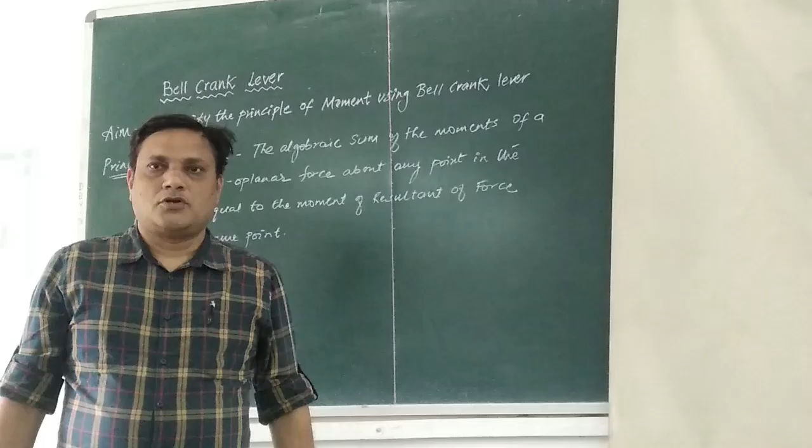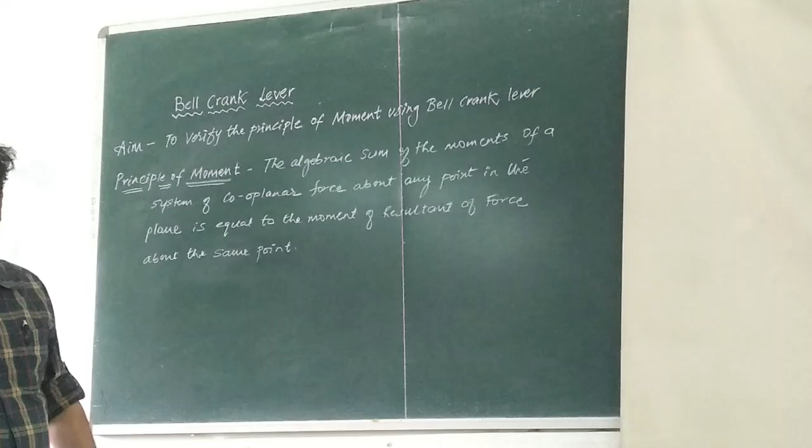So students, up till now you should have understood and also solved some problems related to moments. Today we are going to verify this law of moment, that is the principle of moment, using the Bell-Crank lever.

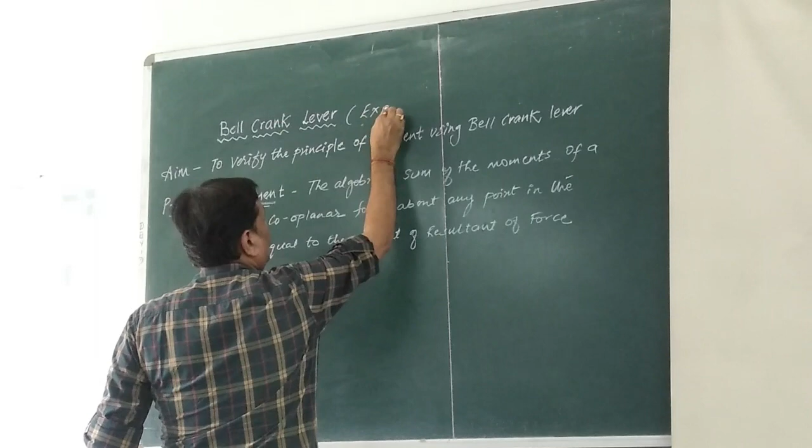Okay, this is experiment number 3 in your manual. See what it says: the aim is to verify the principle of moment using the Bell-Crank lever.

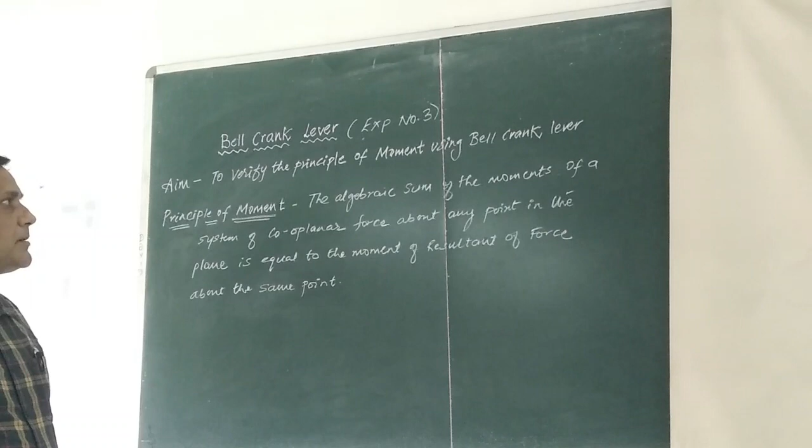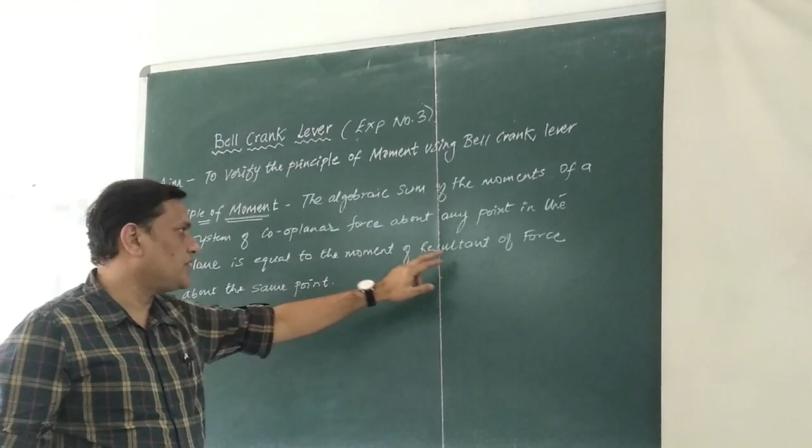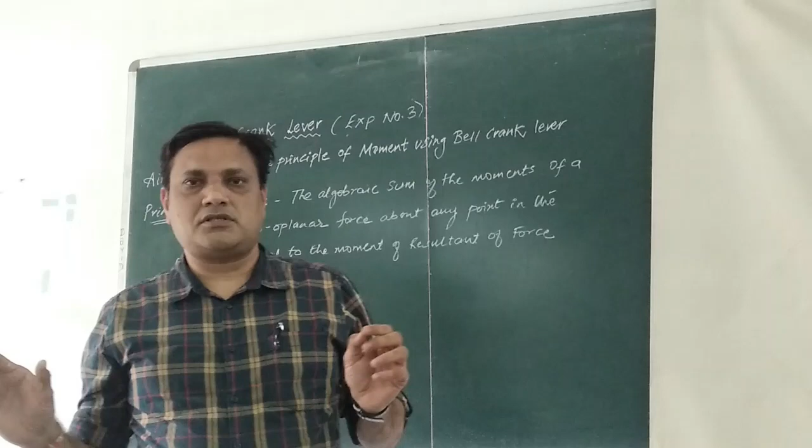What is the principle of moment? It says that the algebraic sum of the moment of a system of coplanar forces about any point in the plane is equal to the moment of the resultant about the same point. So whatever the number of forces are, if you take the moment of n number of forces about any point, that should be equal to the moment of resultant about the same point.

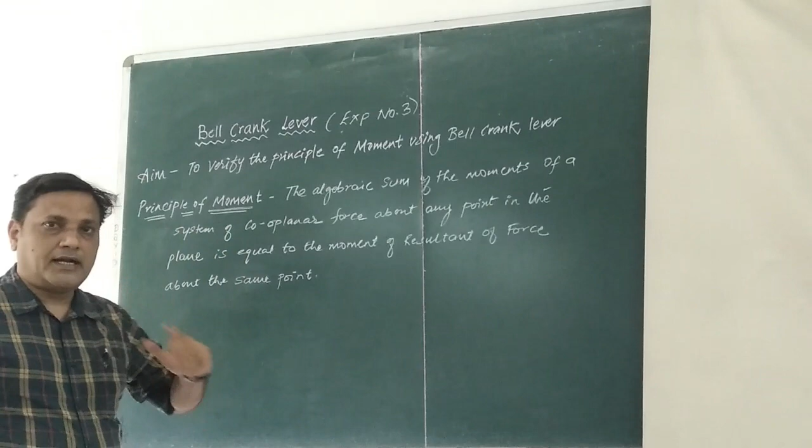So do you correlate that this particular principle of moment is related to, or is it Varignon's law of forces? Okay, so we'll verify that Varignon theorem.

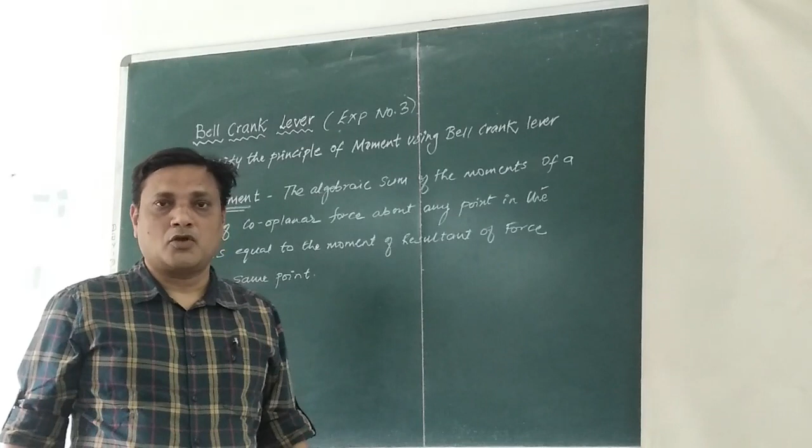So students, this is the apparatus to verify the principle of moment. This particular apparatus consists of, as I have told earlier, a bell crank. Bell crank is nothing but an L-shaped figure, which is a wooden L-shaped member.

This member is having a shorter arm at one side, that is a vertical shorter arm, as well as it is having a longer horizontal arm.

If you see on the horizontal arm there are serrations given, at some fixed distance from a pivot O. This point is the pivot and the serrations are given at equal distance. The distance between the two serrations is 5 centimeters.

And you will see that there are 3 hangers which are given. You can load the hanger or place the hanger anywhere at your convenience.

And you need to take 4 observations. So here there are hangers, you can place them at any point and take the reading.

There are weights available here. We can load the hanger at any convenient weight as per your observation requirement, and then you can take the reading.

Coming to the shorter arm, there is a hook given, and to this hook there is a chain provided, and to this chain there is a spring balance.

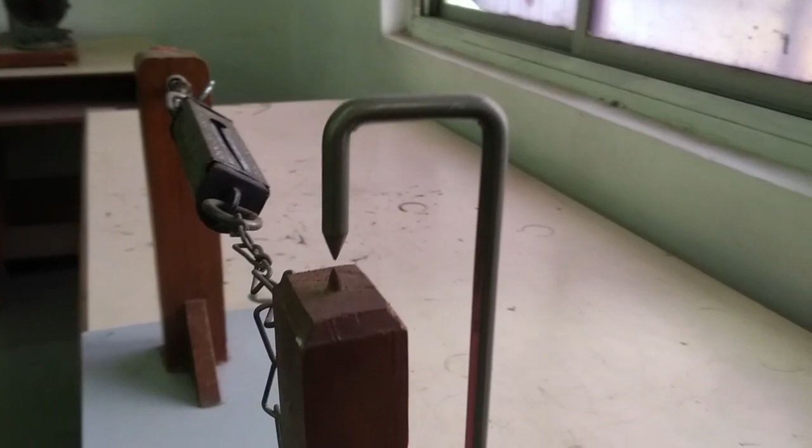Okay, fine. Now here the pointer coincides. Now because of this particular initial setting, there is some amount of tension which has been observed on the spring balance. Why is it observed? Because of what happens is that...

The hangers are provided on the longer arm because it exerts some weight. Though we are neglecting the weight of this hanger, there is still some amount of weight exerted by the hanger, and also the horizontal arm has some amount of weight. So because of this weight, this bell crank gets rocked initially.

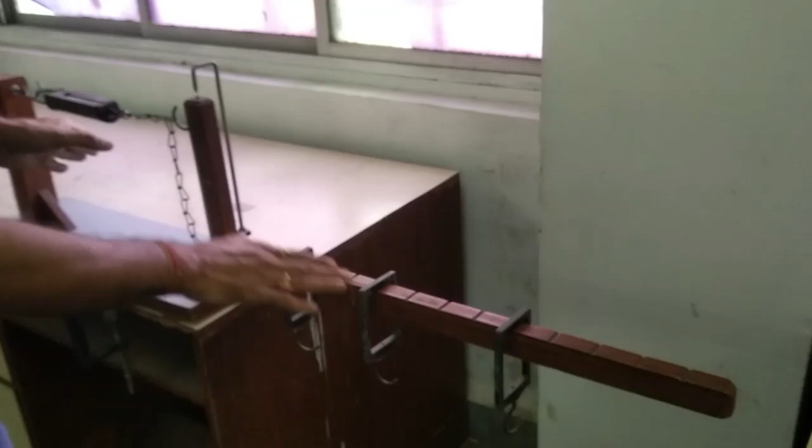So that was the adjustment made with the help of the screw, which we now set as zero. But there is some reading observed on the spring balance, that is called the initial tension. So that particular reading we will have to take, that is called Ti, the initial tension on the spring balance.

There are hangers provided on the longer arm, that is the horizontal arm. We have to provide weights on the hanger such that we give the proper amount of load on the longer arm.

We can have any amount of load given at any distance we want. So suppose this is the configuration where we add 1 kg load at the first hanger, that is W1 is 1 kg, second hanger W2 is 1 kg, and at the third hanger the weight is given as half a kg.

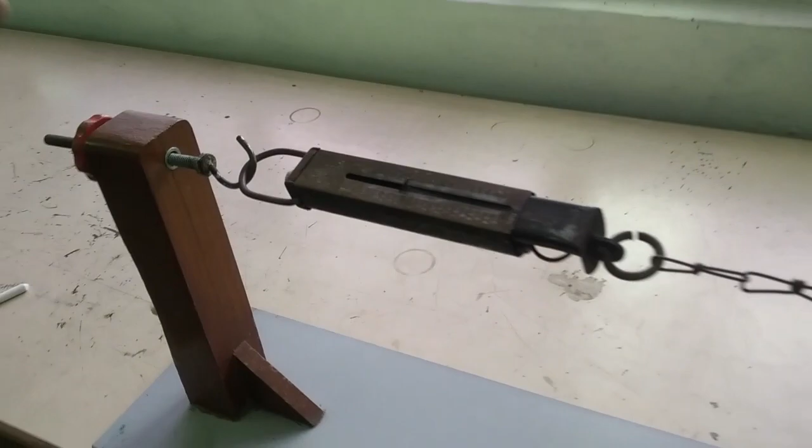Due to this loading condition, the bell crank rocks in the presence of these vertical loads. The pointer has shifted by whatever combination of load and distance you apply, and there will be some amount of tension observed on the spring balance, which is the final tension. You need to take 4 readings with different loading conditions and at different distances, in whatever combination you want.

The distance between the first load and the pivot is x1, the distance between the second load and the pivot is x2, and the distance between the third load and the pivot is x3. So x1, x2 and x3 are the three different positions of weights, and there is a spring balance which gives you the tension, whose distance from the pivot point is 0.21 meter, that is 21 centimeter.

So we have all the data related to calculation like W1, W2, W3, which we convert into Newton. We have x1, x2, x3 that we convert into meters, and we have the tension which is observed on the spring balance, in kg, and we have the distance of point O to the spring balance, which is 0.21 meter.

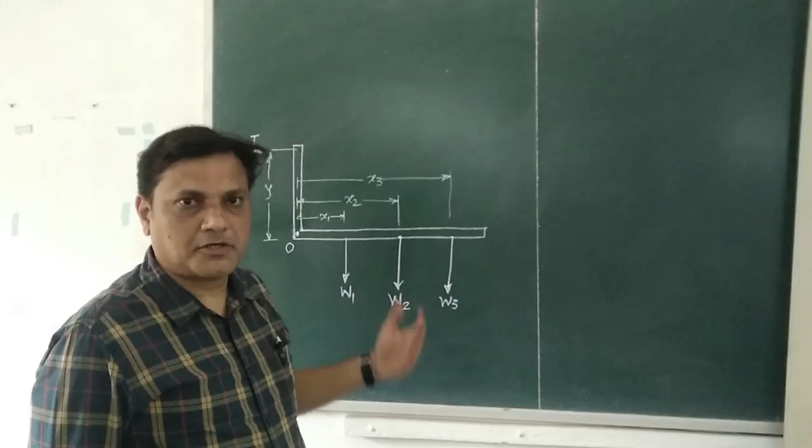So students, after taking at least 4 observations and writing them in the observation table, we come to the calculation part where we try to draw the free body diagram, FBD, of the bell crank lever.

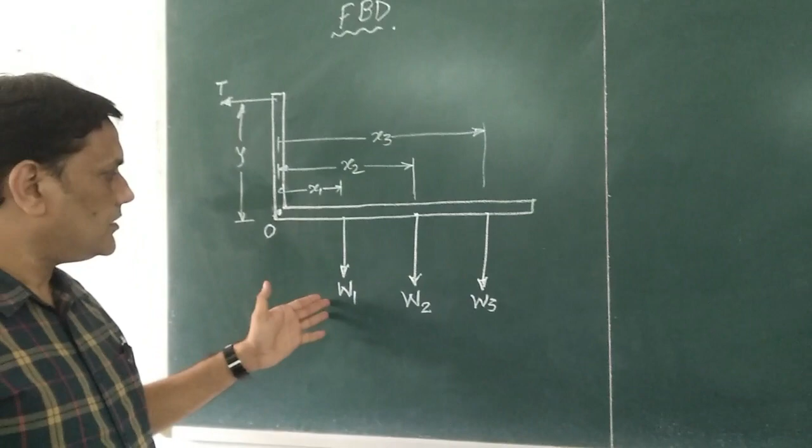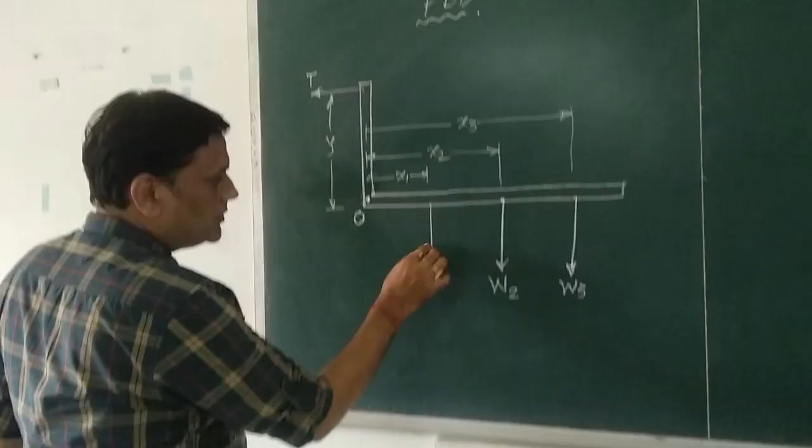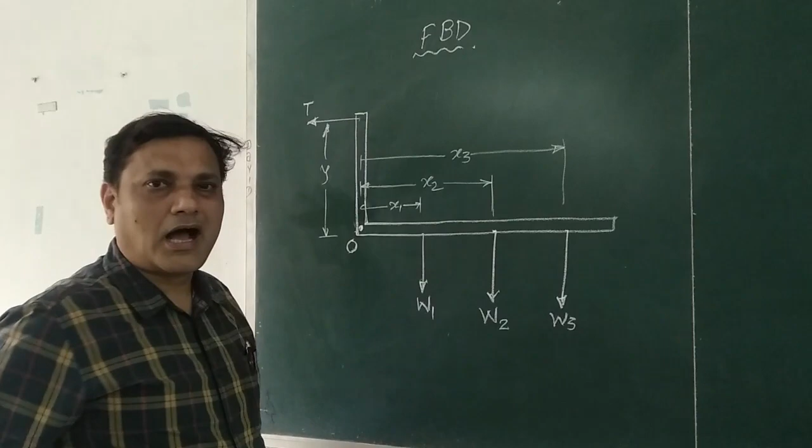We had seen W1, W2, W3 are the three weights added on the longer arm, which was pivoted at point O, and from this fixed point or pivot point, W1 is at an x1 distance, W2 at x2 distance, and W3 at x3 distance. So W1, W2, W3 and x1, x2, x3 are known to us because we decide the weight and also decide the loading distance.

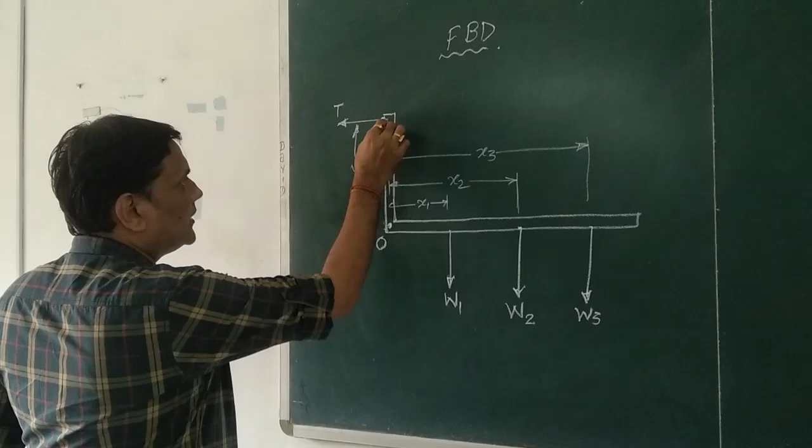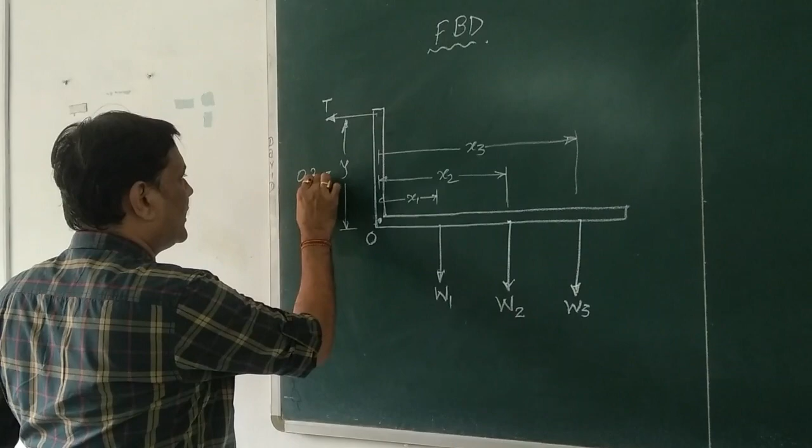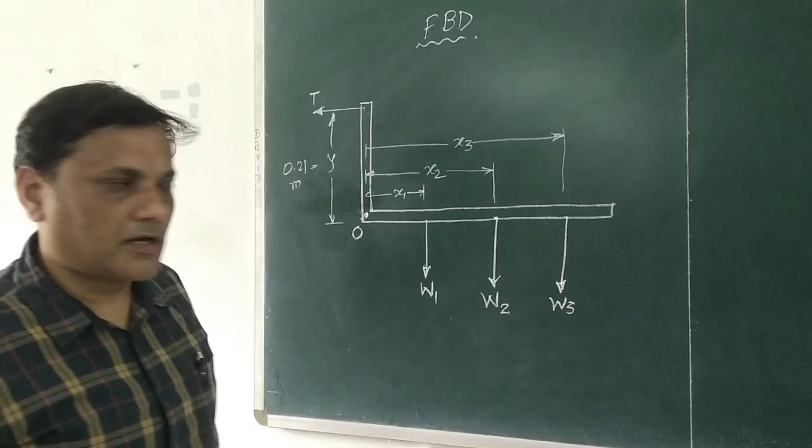Coming to the shorter arm, there is a spring balance which exerts the tension, giving us the tension value, at a distance of y, which is equal to 0.21 meter, that is 21 centimeter. With all this information known to us, we come to the calculation part.

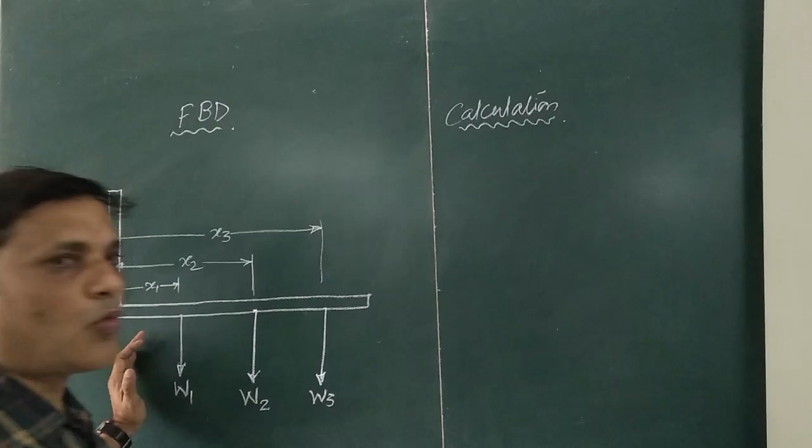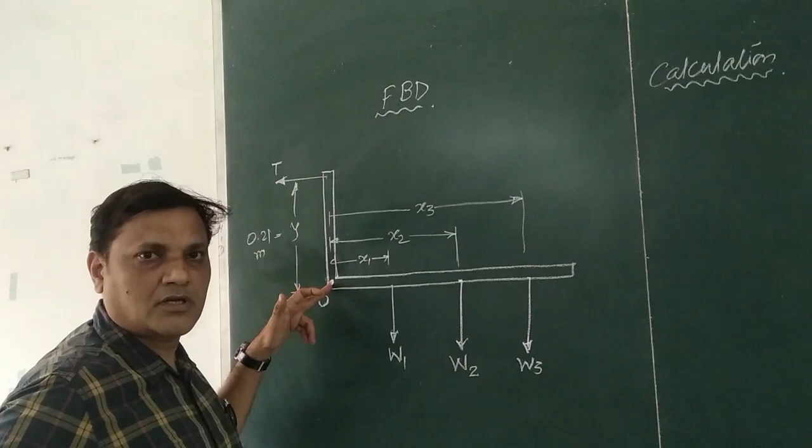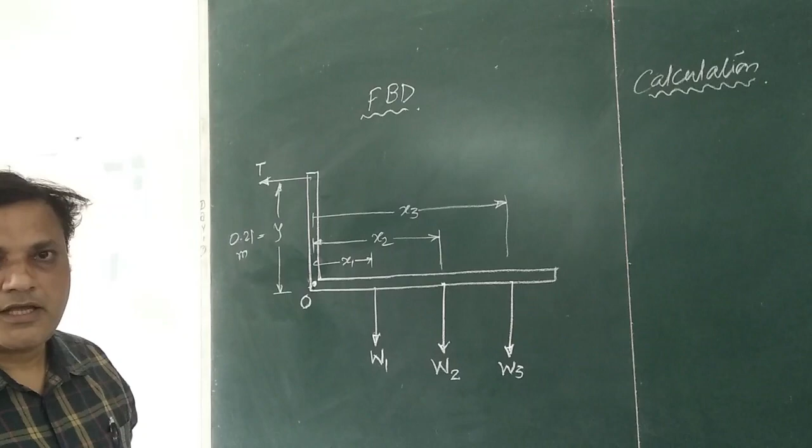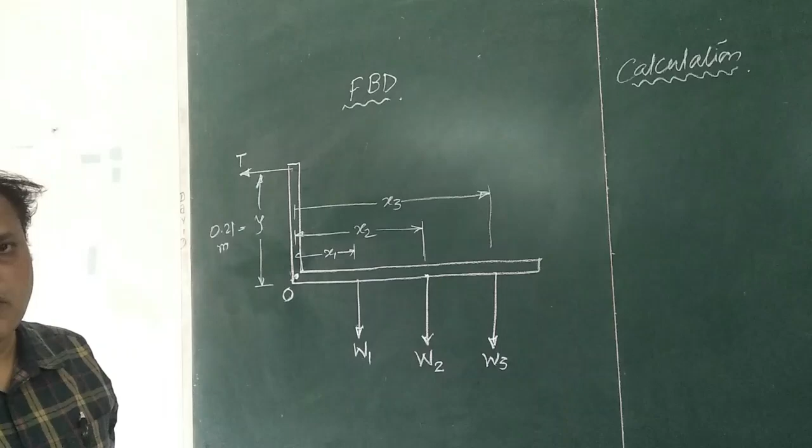Where we try to find out what is the moment. Now we will verify the principle of moment, which states that the moment of each force, like W1 into x1 distance, W2 into x2 distance, W3 into x3 distance, should be equal to T into y distance. If it becomes 0, that is T into y equals the moment of all the forces, then we verify the moment. So now writing the equation for moment, summation of moment about point O, let us write down.

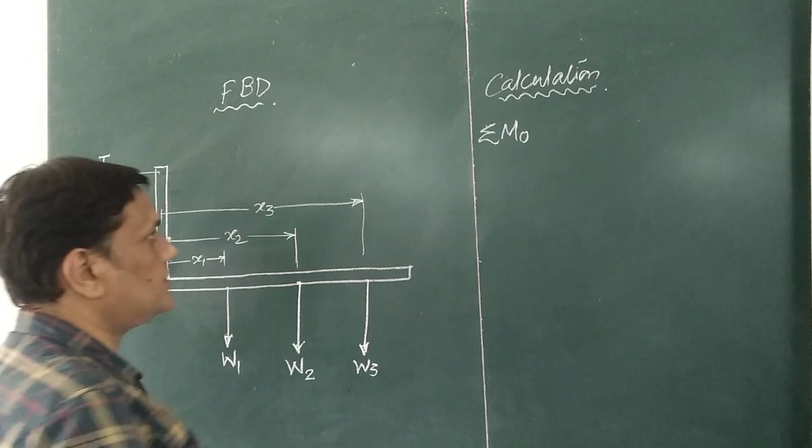T into y, minus W1 into x1, minus W2 into x2, minus W3 into x3. This is the moment taken from point O: T into y is anti-clockwise moment, so positive, whereas W1 into x1, W2 into x2, and W3 into x3 are negative moments.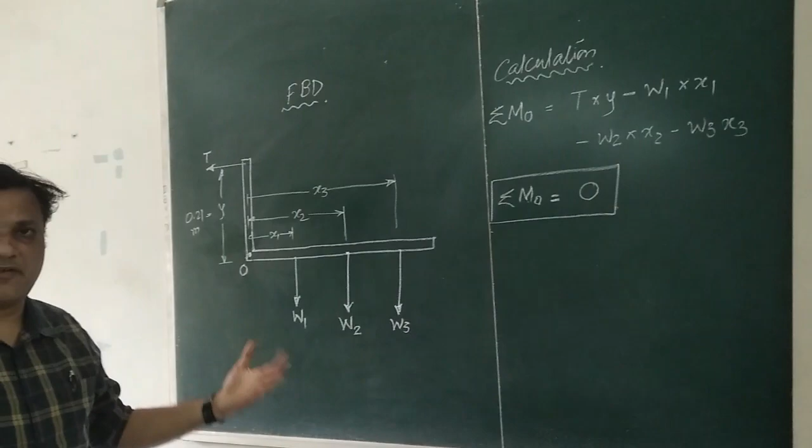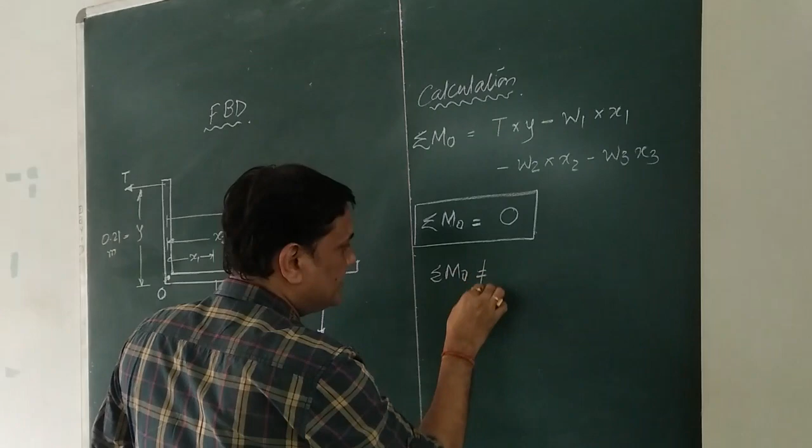Now here, if the summation of moment about a point comes to 0, that is, summation of moment about point O has to be equal to 0, then we say the principle of moment is verified. But normally, if you see when you calculate the observation, you will find that the summation of moment does not come exactly equal to 0, but it comes close to 0.

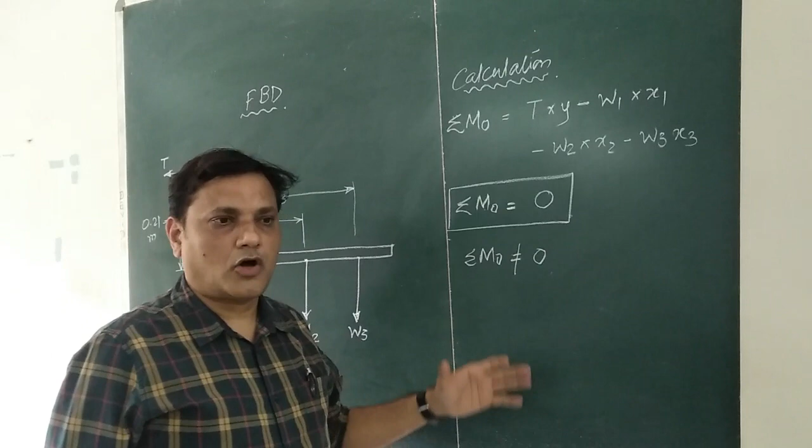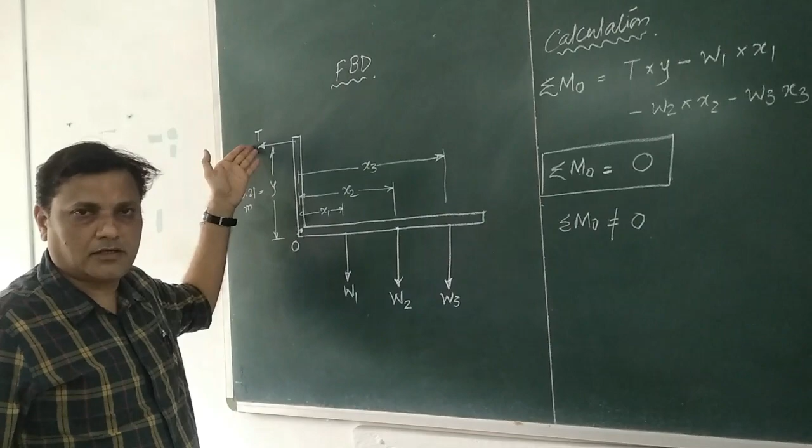There are various problems as to why the summation of moment doesn't come equal to 0. Like, we are not considering the weight of the hangers, that is one parameter. Second, when taking the reading of T on the spring balance, the stiffness of the spring may not be right, there could be rust in the spring so it does not give the exact reading, and when the scale on the spring balance is not proper, there is a parallax error while taking the reading. So these are some of the errors which are there.

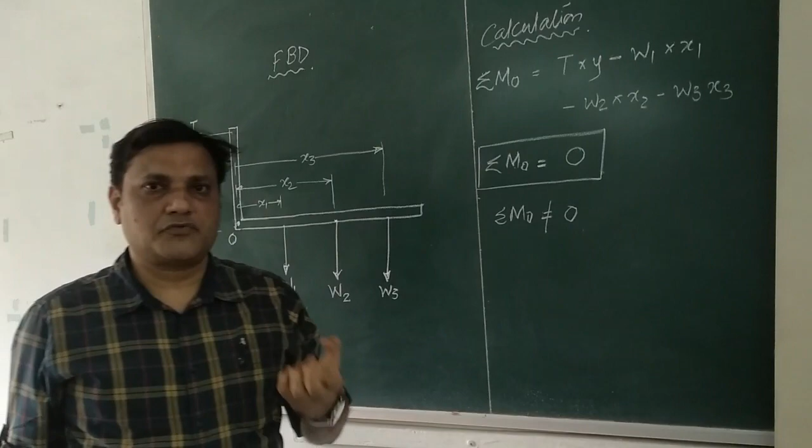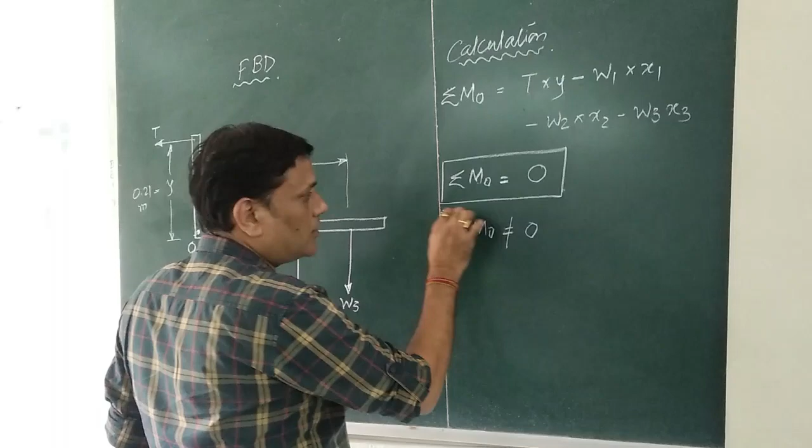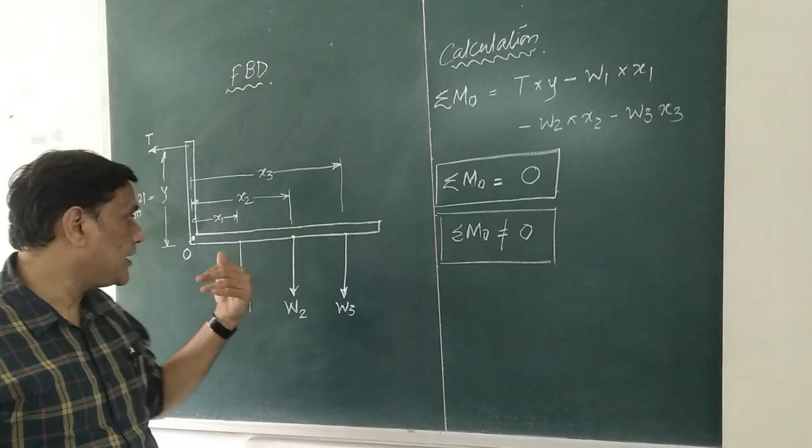So the moment doesn't come equal to 0, but it approaches towards 0. Still, if the moment does not come to 0, we can say that the principle of moment is verified, because the moment about a given point comes closer to 0. Hence, we can conclude the principle of moment is verified with the help of the bell crank given.